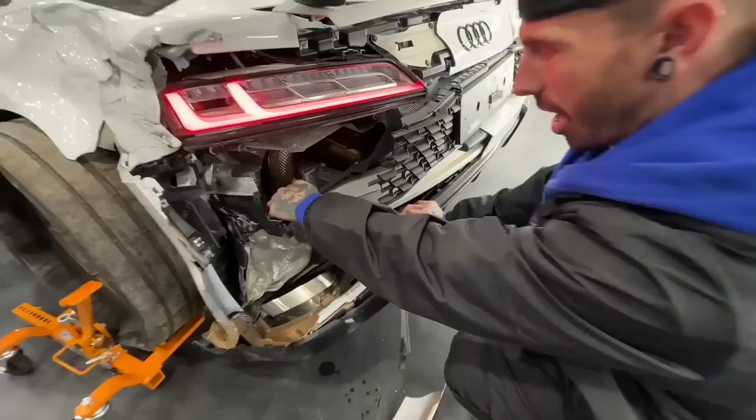You rarely find a German car with a real rear engine, a great design, and high-speed performance. Mat Armstrong decided to bring the R8 from an auction and repair it. The goal was to return the car to its original condition, and perhaps a little better, to be a gift for its owner, Liam. Let us repair the improved 2022 Audi R8.

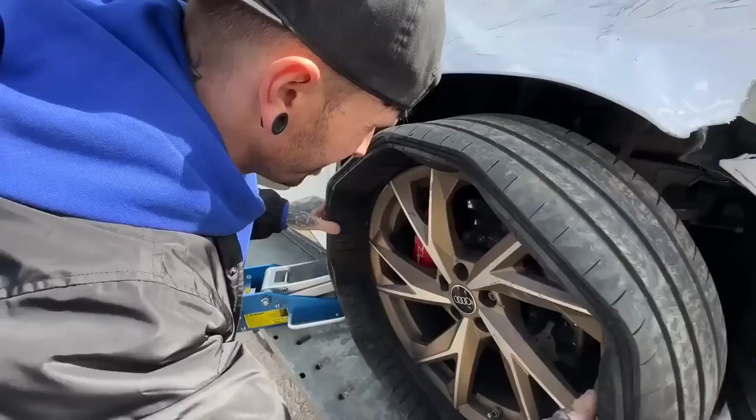Let's start talking about the German car. A strong shock, or the entire collision, was from the back, and this made their concentration at the beginning on the back of the car. It is true that the view from afar does not seem simple, but most likely nothing reached the structure or the surrounding parts, and this gave them great hope that the reform will not take a long time or cost a lot. Here, there are no open airbags, so it will be able to move normally.

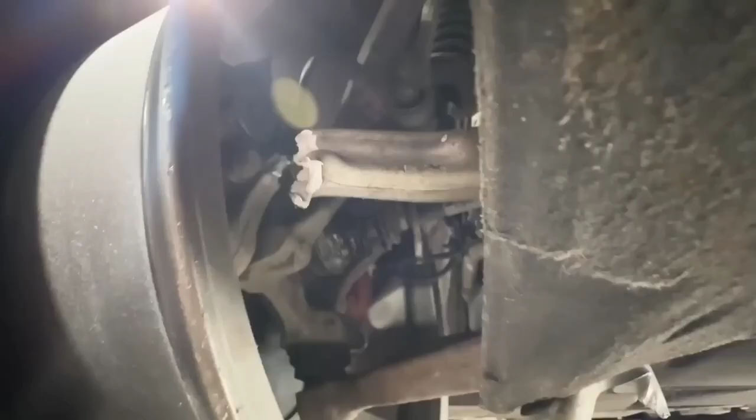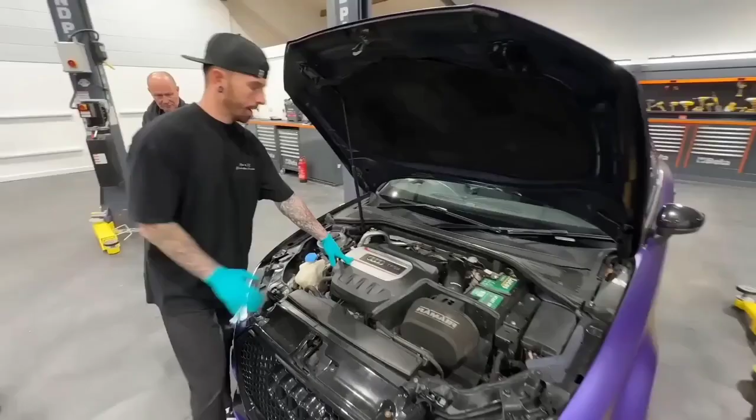You have connecting bars and rear control arm, which are essential parts of this. When affected, it makes the car unable to properly direct or move, and this clear damage requires the replacement of these parts completely. Initially we know most of the damage that occurred in the R8, but before we start the repair stages, let's take a look first on the Audi also, but this time the S3.

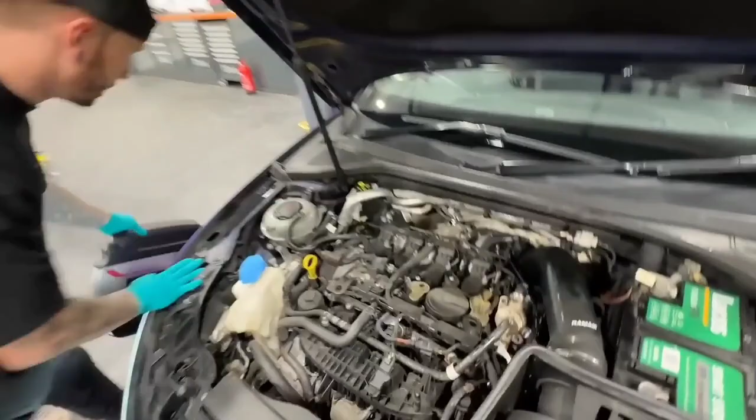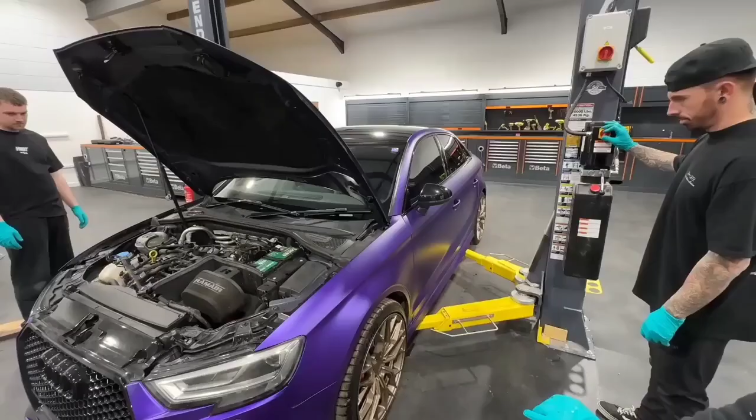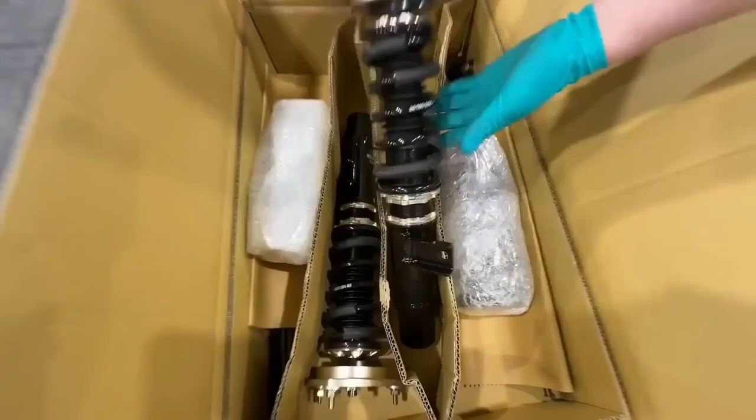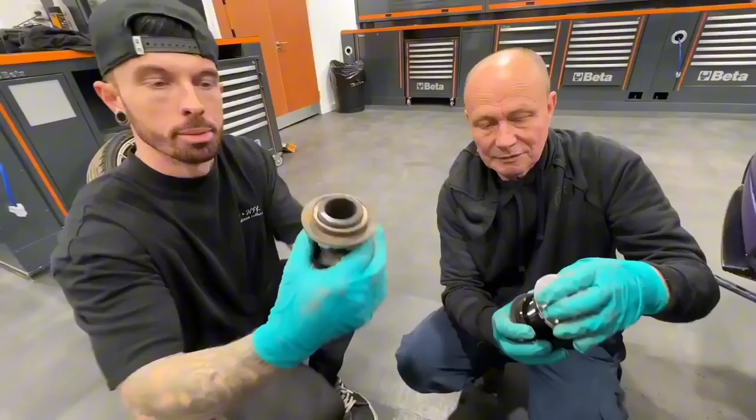This car was supposed to make thick white smoke, usually an indication of problems with the burning of oil inside the engine. They initially suspected the turbo, because if there is a problem in it, it is natural for the oil to leak into the combustion chamber. They removed the plastic cap from the engine interface, finding other parts with a lot of oil. The presence of oil residue on these parts confirmed the presence of a leak inside the combustion chambers.

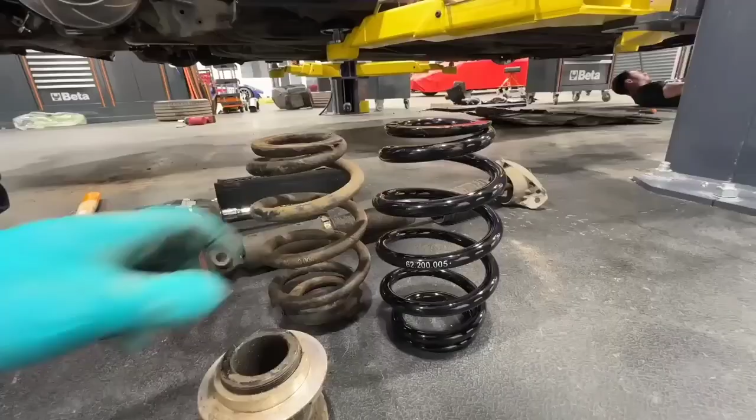They decided to completely replace the turbo to ensure the problem is solved from its roots, and bought a new turbo kit. They started removing the air filter tube, lifting the car on a crane, then removing the two front wheels. Next, they reinstalled the air filter tube, but from a different place.

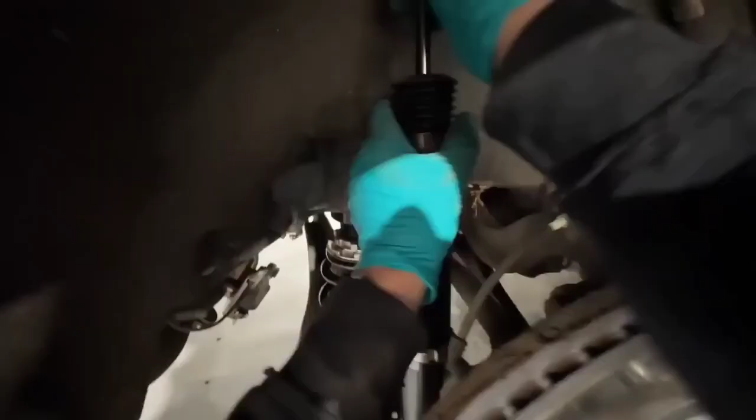The shock absorbers in this car were not the best. They removed the right cover and bought new shock absorbers, better than those installed in the car. They removed the battery completely, an important step to ensure enough safety when working on the electricity of the car.

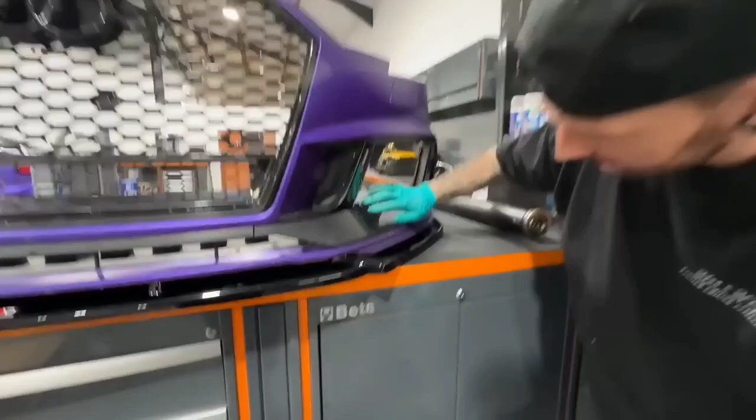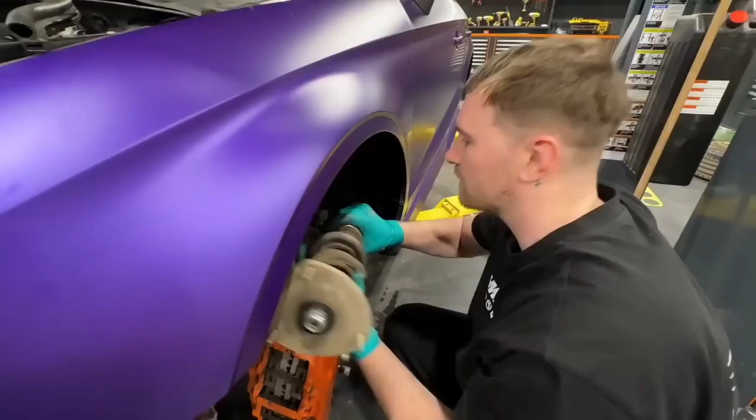He began removing the front shock absorbers and removing the lining of the shelf on the left side, while they were trying to decipher the original control buttons on the steering wheel to replace them and install new control buttons. Armstrong wanted to lift the car a little from the ground, because lifting it facilitated its movement over bumps and reduces the possibility of friction.

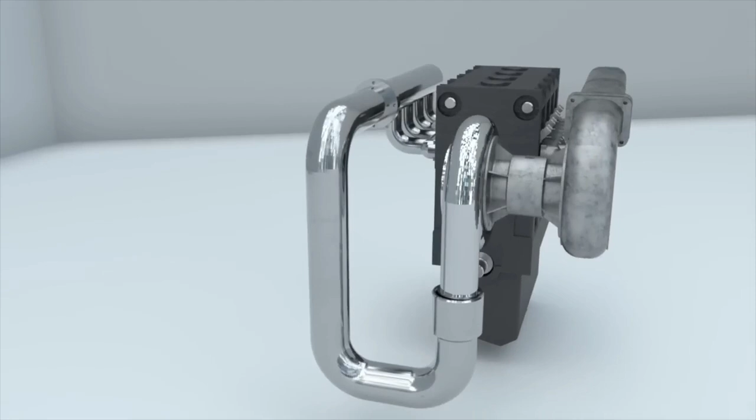Of course, the spring is supposed to install this height on its base. The new spring is slightly higher than the old spring. This is a direct and simple solution to increase the height of the car without complicated adjustments, so it does not need to do anything else to increase the height.

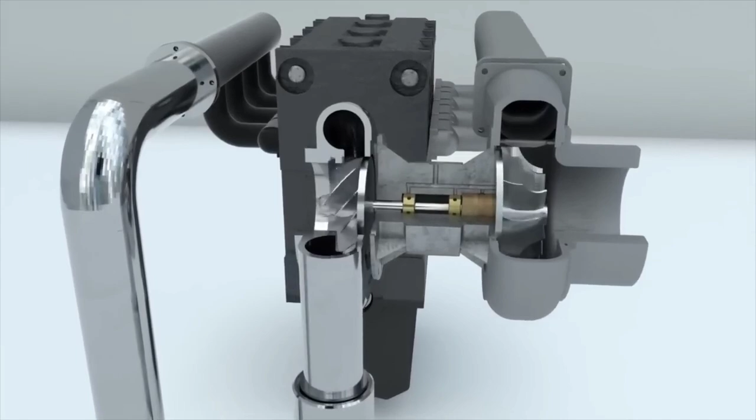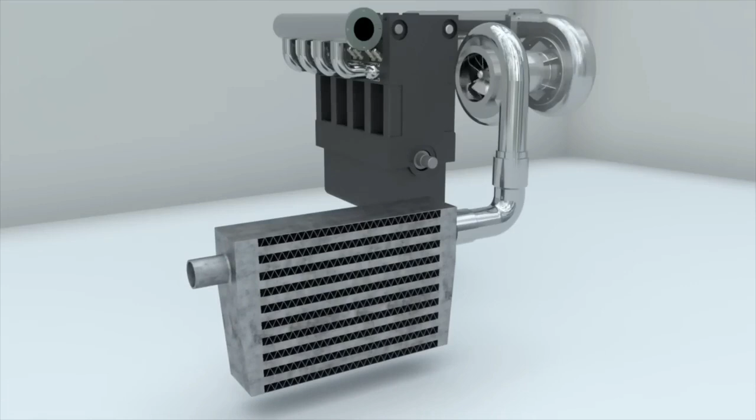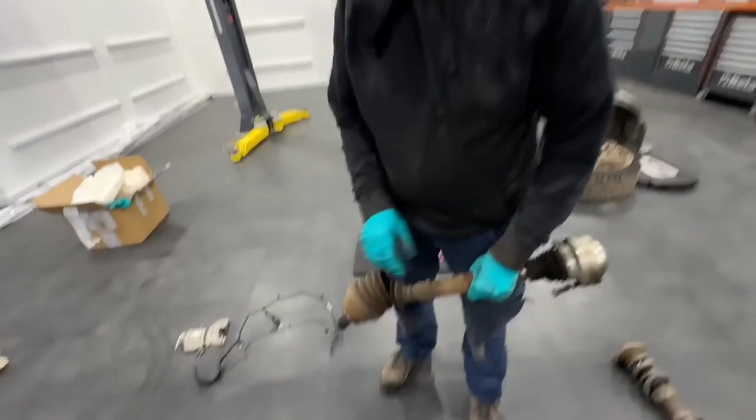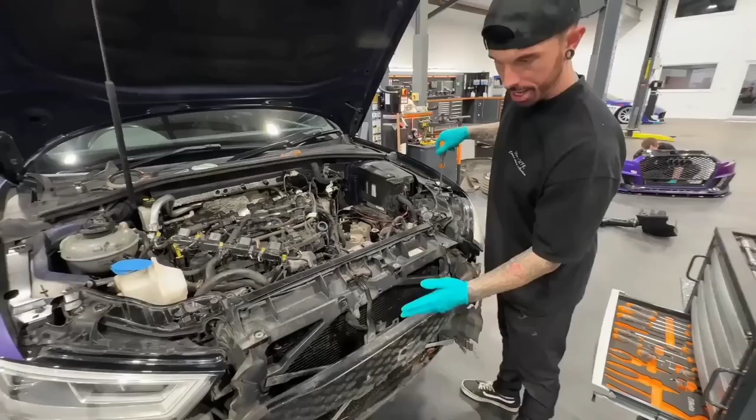He started draining the transmission oil and also bought a liquid to clean and polish the car. He bought a front wing fender, but its size and dimensions were not accurate, reflecting the difficulty of installing non-original parts, or parts designed for a different model, because the wing they bought was for the RS3 and not the S3. But in the end, they knew how to install it properly, and it looked good.

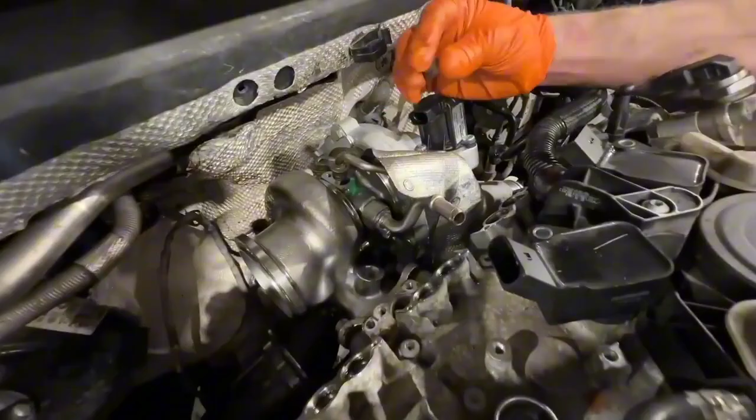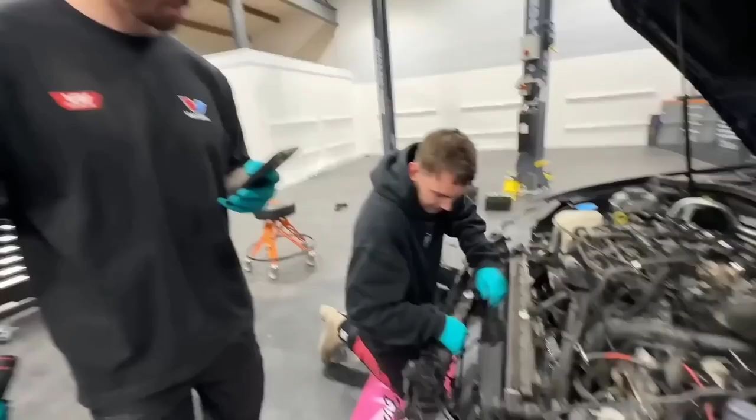Let's quickly remember how this turbine works and what its idea is in the first place. The turbine contains a part called the turbine wheel, which looks like a fan. This turbine is responsible for converting exhaust gases into rotational movement. The exhaust gases collide with its fan and push it to rotate at a very high speed, reaching up to 100,000 revolutions per minute.

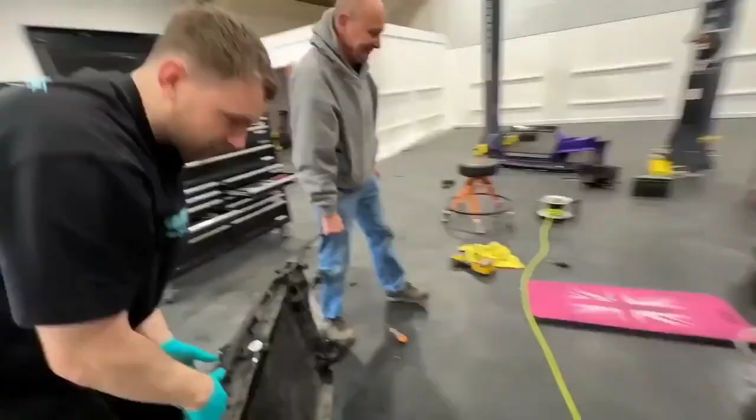This turbine connects to a shaft located in the middle of the turbo. This shaft is the link that transmits movement from the turbine to the compressor. On the other end of the same shaft is the compressor, whose function is to pull fresh air from outside the car through the air filter and press it strongly towards the engine.

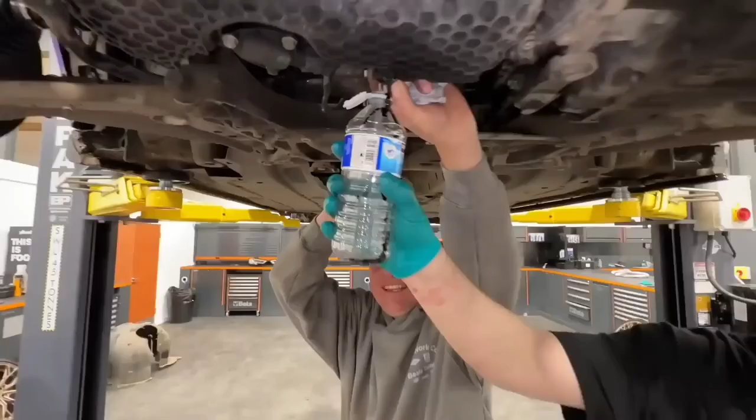This compressed air, after cooling, is characterized by high density, meaning more oxygen goes to the intake manifold above the engine. When this air enters the combustion chamber, it increases the power of the engine, increases the torque, and increases the overall strength of the engine.

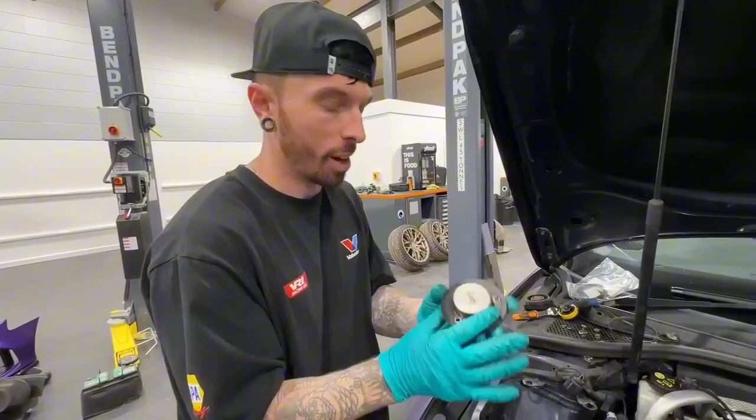This is the old drive shaft, the main part of transmission from the gearbox to the wheels. It was clear from its condition that it was in very bad shape, so he bought a new drive shaft and began installing it in its place.

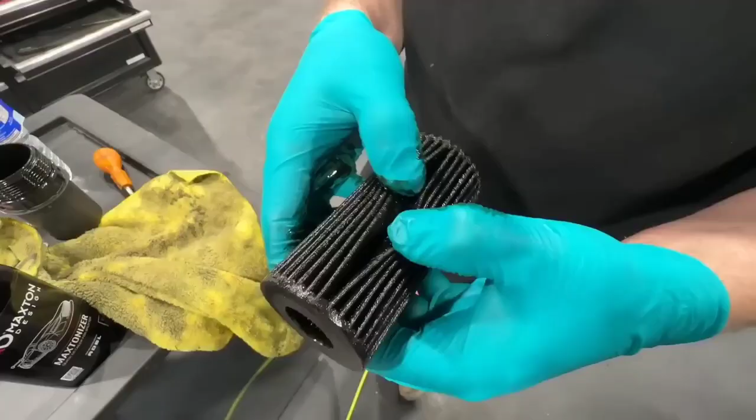The intercooler of this car was dirty with a large amount of oil, and to reach this cooler, located behind the air conditioner, he was forced to dismantle the entire front end, including the lamps and the protective bumper. This step requires time and effort, but he started doing it quickly.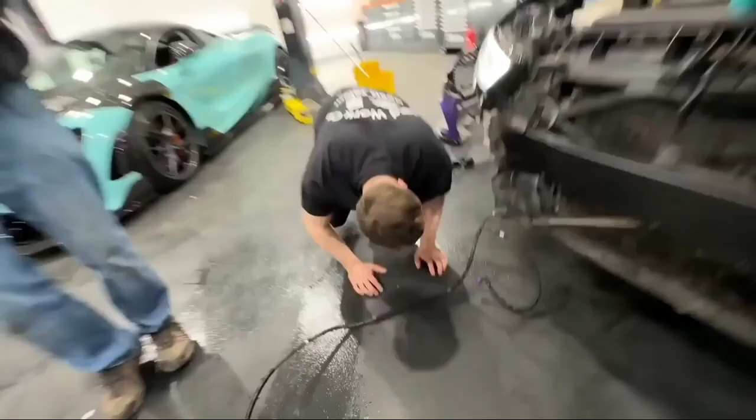He removed the first front lamp, which needed some polishing. Someone else was with him working on installing the turbo immediately. He installed it in place, but it was not yet fixed with bolts and clamps. He bought a new black gasket and started installing it.

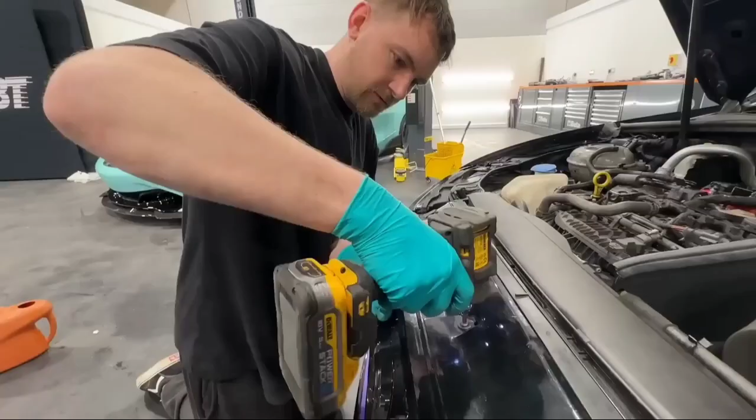He removed the ignition coil to ensure there was no oil on it, and began installing the coils. The ignition coil, or ignition module, is responsible for generating the spark necessary to burn fuel in the combustion chambers. He then began to disassemble the entire protective rod.

After that, he reached the intercooler and started removing it. He wanted to clean it, and to clean this cooler specifically, you will likely need gasoline or anything containing alcohol. So he brought gasoline and started pouring a little of it into the cooler's opening.

He moved the cooler around so the gasoline would reach all its internal parts, then poured all the gasoline back out of the cooler. This simple cleaning process restores the cooler to its original state and ensures its maximum performance.

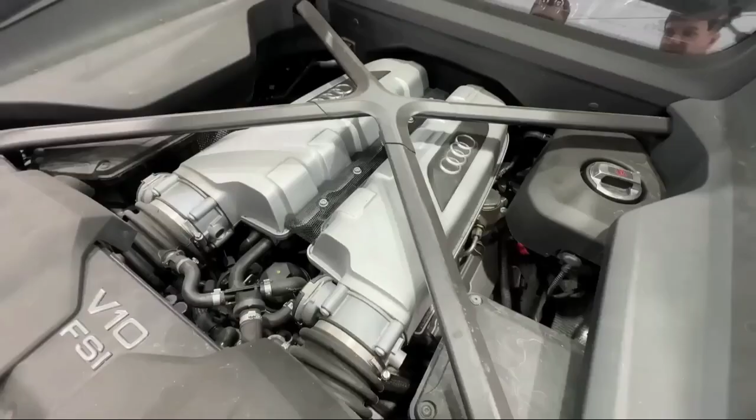He finished that step, brought the cooler and pipe back into the car, installed the tubes and connected the hoses. Of course, the tubes must be installed tightly to prevent compressed air from leaking out of them. He then installed the protective rod and fixed it well.

He started draining all the engine oil and discovered a problem in the camshaft system. The camshaft adjustment, or VVT system, controls the opening and closing of the valves to improve engine performance. This is a common problem.

Especially in TFSI engines, many have faced a problem causing oil leakage. This leakage affects the oil level and harms the engine in the long run. So he started removing pieces of the old VVT system and installing new pieces to solve this problem completely. The new spare parts guarantee correct valve timing, which is a perfect precaution.

He removed the old oil filter and installed a new filter in its place. He brought new engine oil and began adding exactly 5 liters. After finishing filling it, he started the car, and it worked normally the first time.

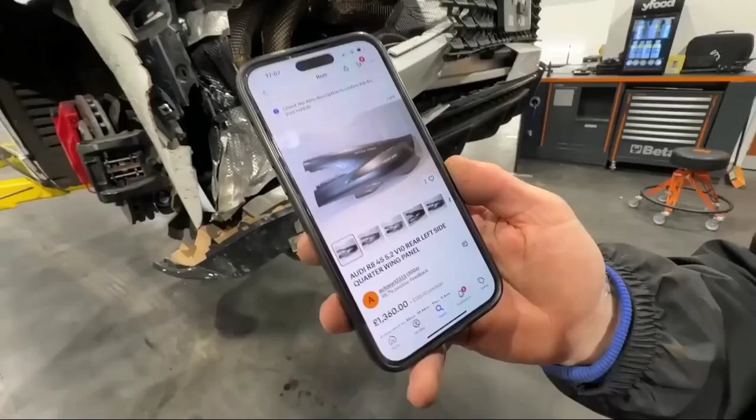The engine sound was smooth and free of problems, with no smoke rising from the exhaust. But suddenly an oil leak appeared from the bottom of the car. This oil leak was coming from the turbocharger return line, so he brought a new part and started installing it in the line where the problem was.

He tightened the shocks and screws from the top, put the wheels back in place, and brought the car back down to the ground.

After that, he went out and tested the car and had no malfunction. No problems at all. We finished working on the first Audi, the S3. We now start with the R8, which is our topic today.

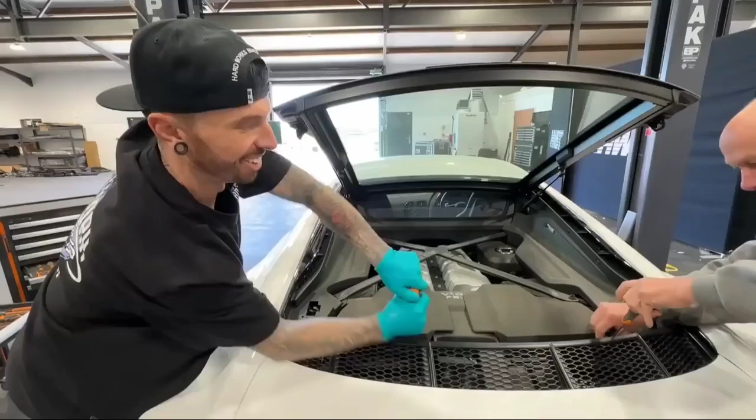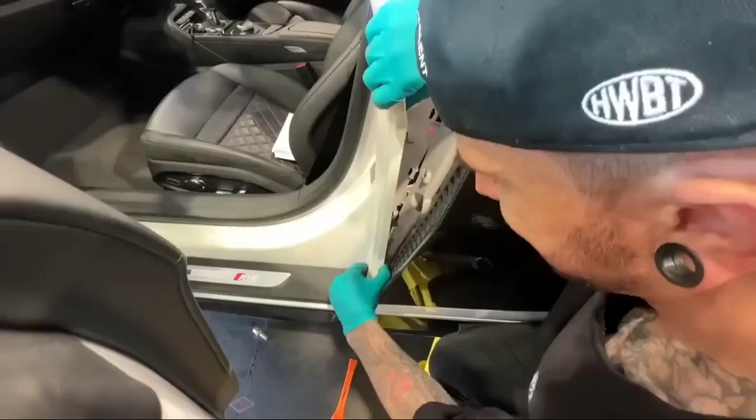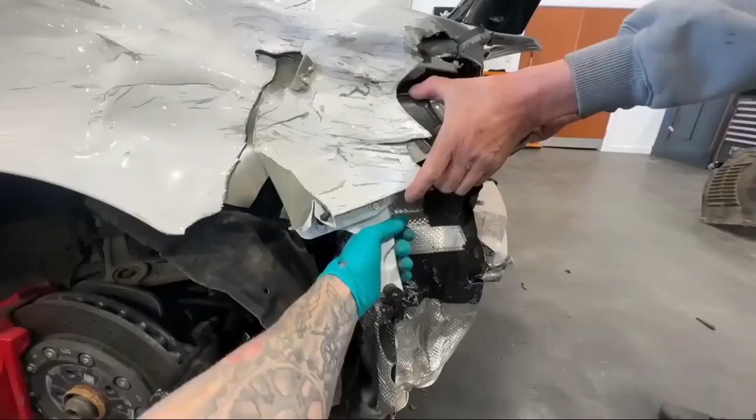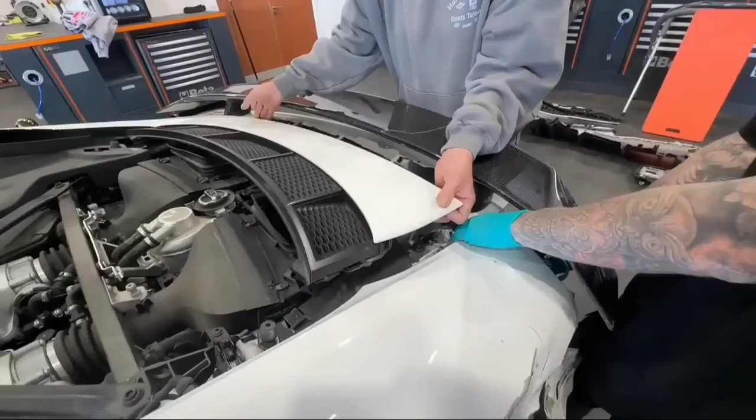The blow here was in the left back flap, and the rim, of course, and the arm still need to be changed. Try the car first. The sound of the cracking that appeared at the beginning had completely disappeared. This is evidence that the work is going well so far.

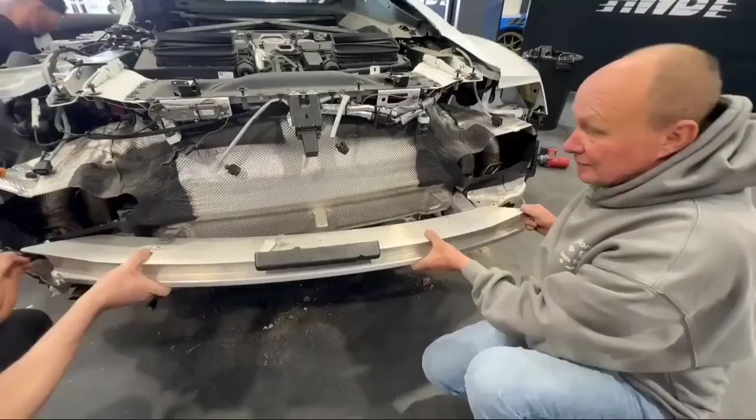He started to remove the threshold from the bottom. After that, remove the plastic parts. Remove all parts of the back quarter to start replacing the damaged parts. Remove the air filter housing. Note that the installed exhaust system has been broken. Remove the air filter from the other side.

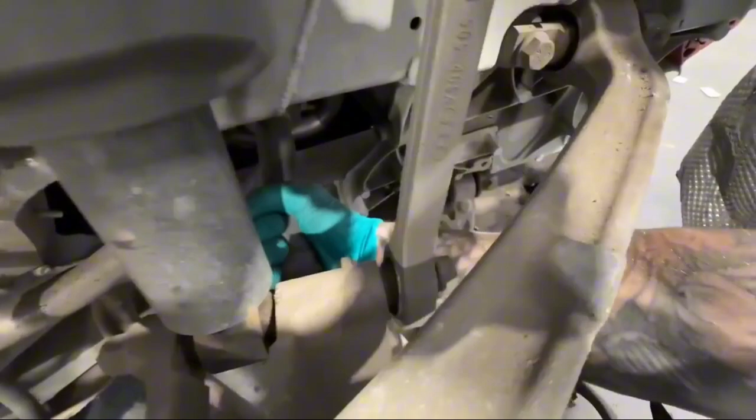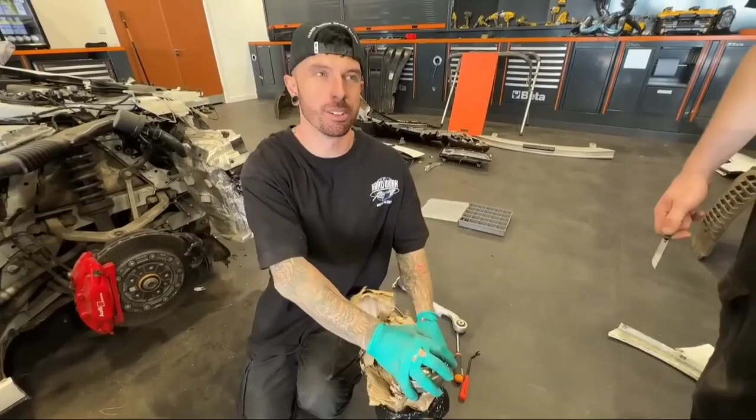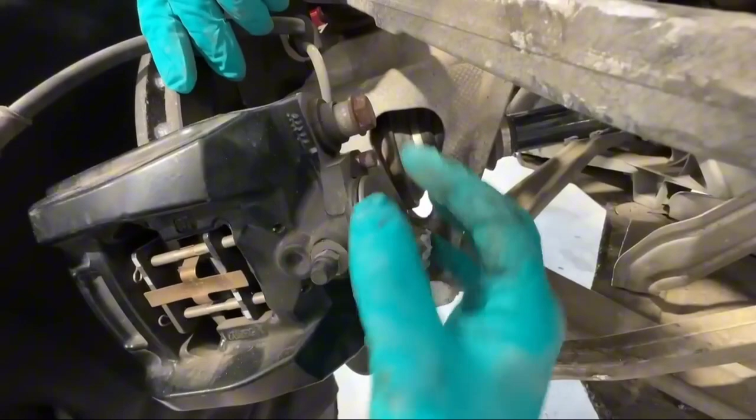Next, he began to remove all the screws that fix the back structure of the car and remove this part completely. Bring a hammer and began to adjust a portion of the back flap structure below the back lamp. Using the hammer is a temporary solution at first and not at all accurate, but to avoid leaving voids between the back lamp and the flap, he hit it hard, so this part stuck out too much. They had to completely remove the car flap to get to this part quickly.

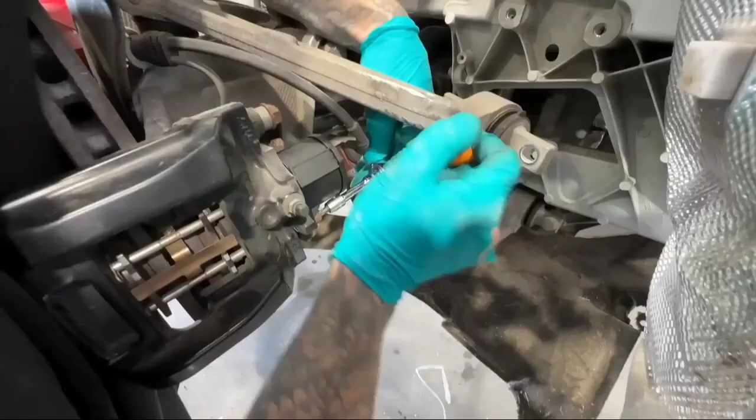He removed the flap, brought a welding flame and began to heat the parts of the structure surrounding the front lamp. The heating, of course, makes the metal more flexible and allows it to be modified more precisely, because cold methods are not a suitable solution for these parts. He began to heat and adjust it so that the front lamp was finally installed without any gaps. Pass the flap. Second, the front lamp bases he began to fix well in place to ensure that they do not move or fall from their place at all.

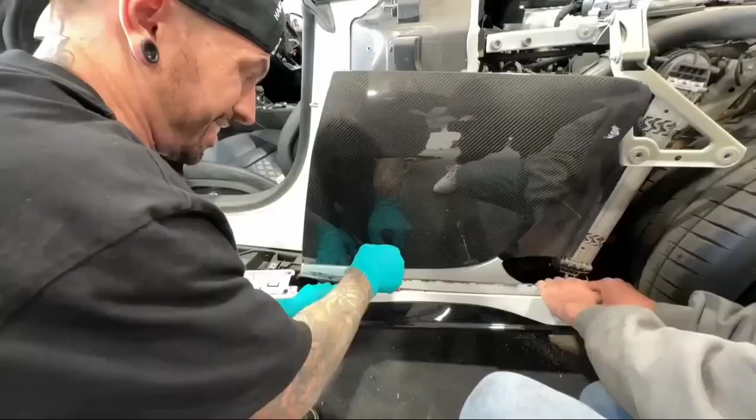Return to the door installation step. William was installing vehicle ventilation holes. These openings are important to cool certain parts or to improve aerodynamics. First, bring the glass and began to install it. After that, bring up the upholstery of the door and began to install it and fix it well in its place. Test the glass and found that it is crooked and not fixed properly, unlike the other side. He did not face any problems there.

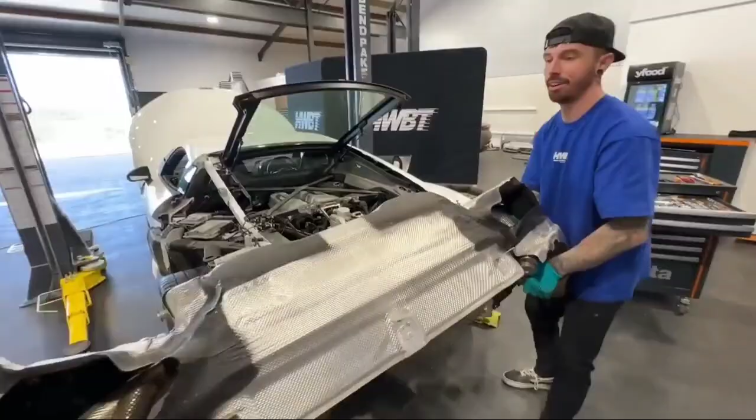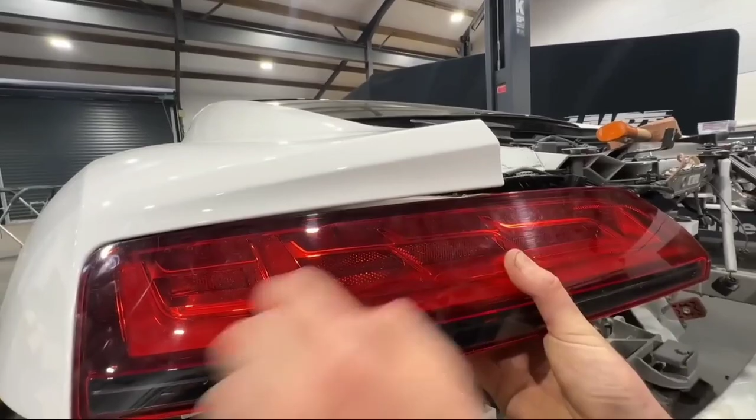He removed the upholstery again to see the exact place of the problem, but he will leave it now and return to it later. Bring part of the rear hood, made from carbon fiber. It is not normal. He removed the old one and fitted the new one in place. He bought a new exhaust box, much lighter than the old one. The lower tube looks as it is. The lower tube here is the first part.

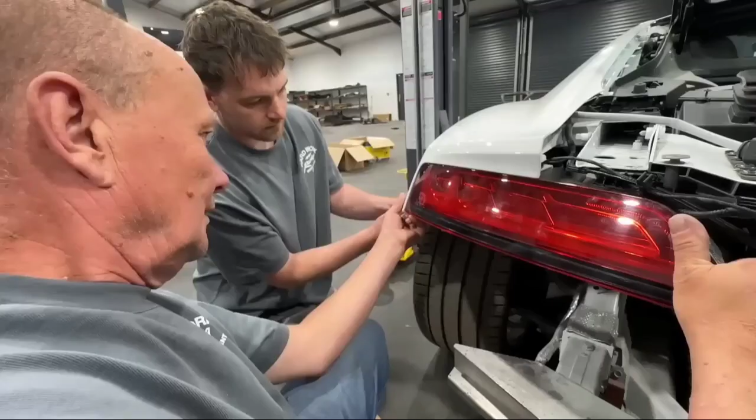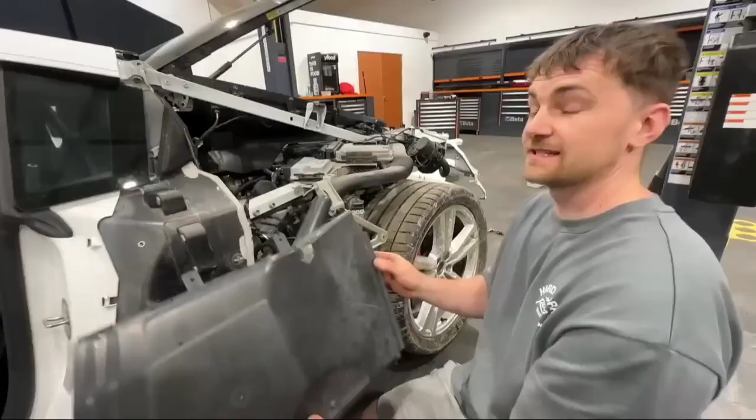Of the new sports exhaust system, they started installing it in the car, and the exhaust tube, even if it is modified, is usually fitted with an oxygen sensor. The sensors installed in the exhaust tube must be connected tightly to give very accurate readings. The new exhaust system does not have an OPF filter, whose function is to reduce harmful emissions from the exhaust. Of course, it will make a much higher and stronger sound, but there is another problem, which is the difficulty of reading the oxygen sensor.

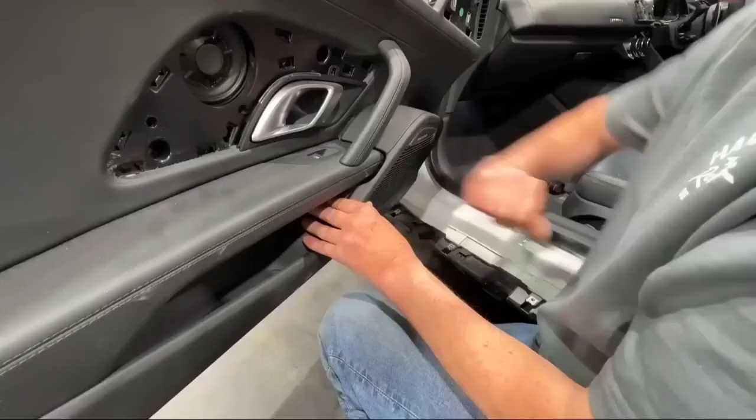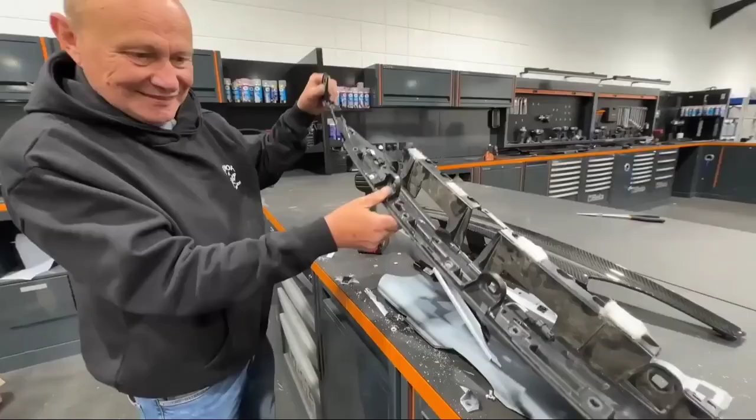It is the difficulty of reading the oxygen sensor present after the filter, because the computer expects the presence of an OPF filter in the original car, and its reading as well. Consequently, they may have to do special programming to avoid the appearance of the check engine light, because the programming cancels the readings of these sensors, so the fault light does not appear on the instrument cluster. They started installing the rest of the exhaust system, such as the middle pipes, as well as the final connections to completely close the exhaust system.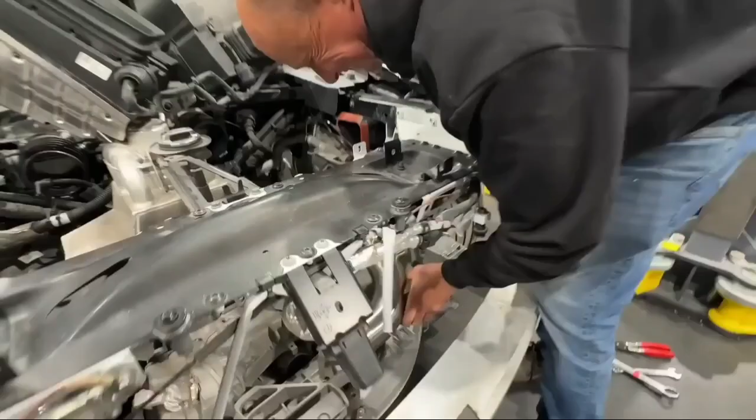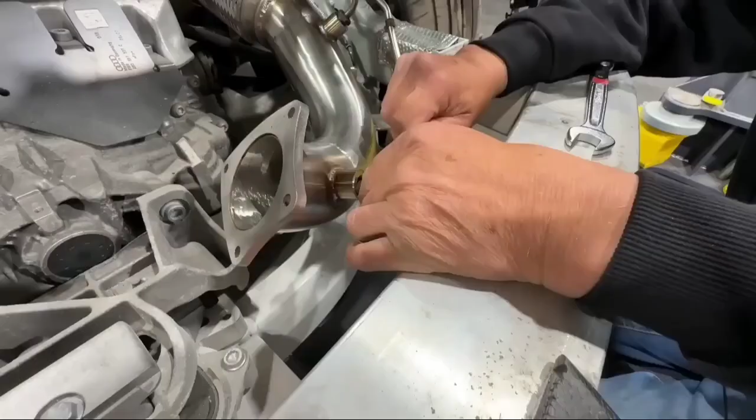These are the back tubes and the final sound, or the so-called silencer. The silencer box is responsible for reducing the exhaust noise, which is the last part of the entire system. Each part is installed in place with metal fillings on it to prevent any leakage of exhaust gas between exhaust tubes and chassis. There are thermal insulation strips in places behind the exhaust. This thermal insulation is very important to protect the car parts from high exhaust heat.

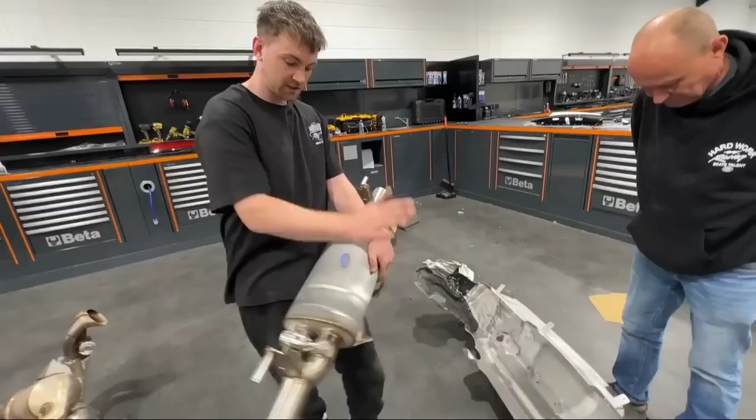Next, the hose is installed for opening and closing the exhaust valves. These valves allow control of the sound level according to the driving mode. After that, the engine was operated to hear the exhaust sound.

After the adjustments, Armstrong brought all the pieces damaged as a result of the accident, such as the rear diffuser, the front splitter, and the fine front wings known as canards, which help to direct the air and give the car a sporty and strong look. He also requested the side sills. Of course, some of these pieces were bought normally, while others were made of carbon fiber.

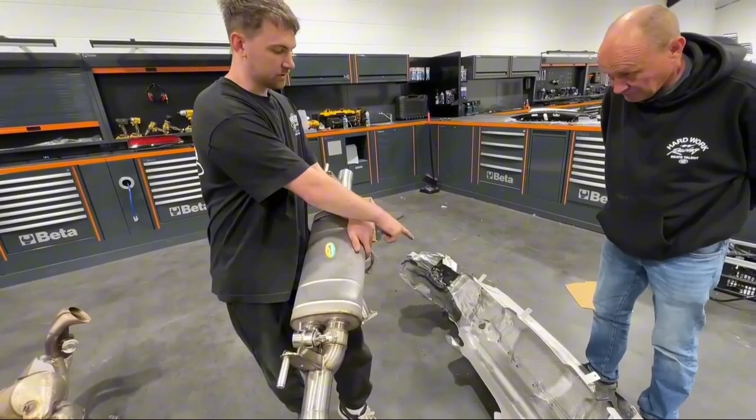He brought the front splitter and began to put an adhesive around the entire structure. Of course, he had to use a very powerful material to ensure it is well installed. After that, he installed it in the car and fixed it with nails from the bottom to ensure that it does not fall later. He began to install the wing on the front bumper from the side.

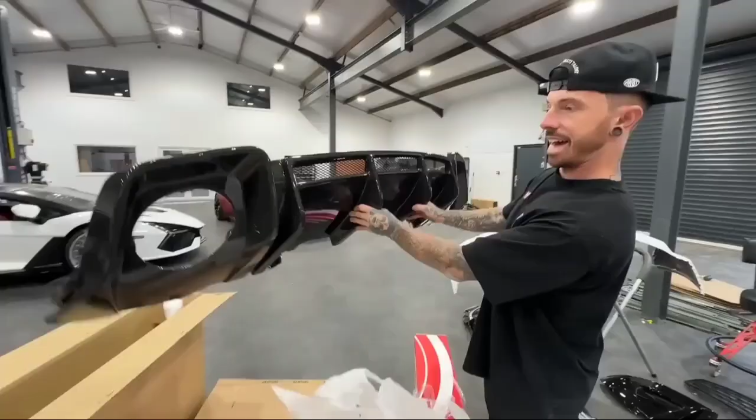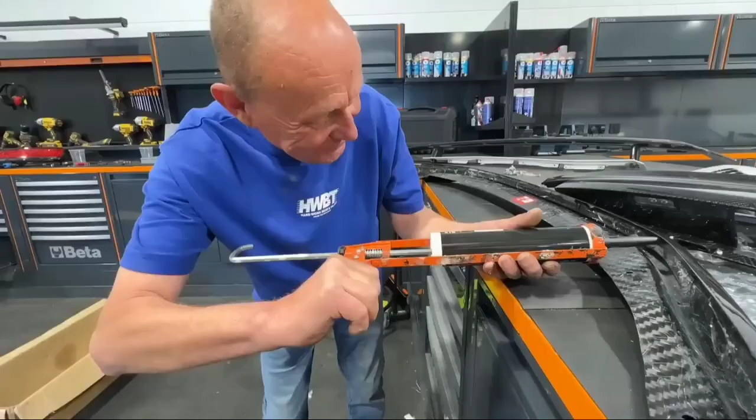He began to install the top of the bumper. After that, he installed the new bumper with its new diffuser, brought the Audi logo, and started installing it on the rear bumper. They also brought the new carbon fiber sill and began to put the material on it. After that, they installed it in the car itself.

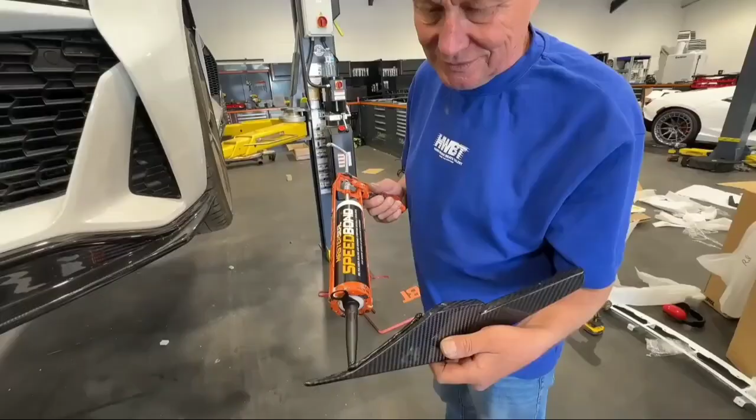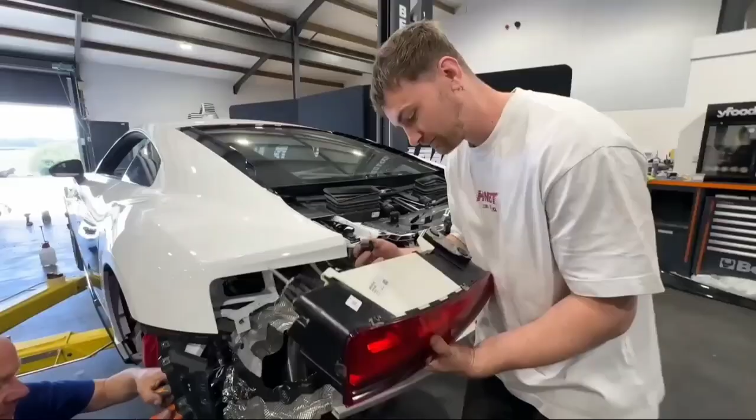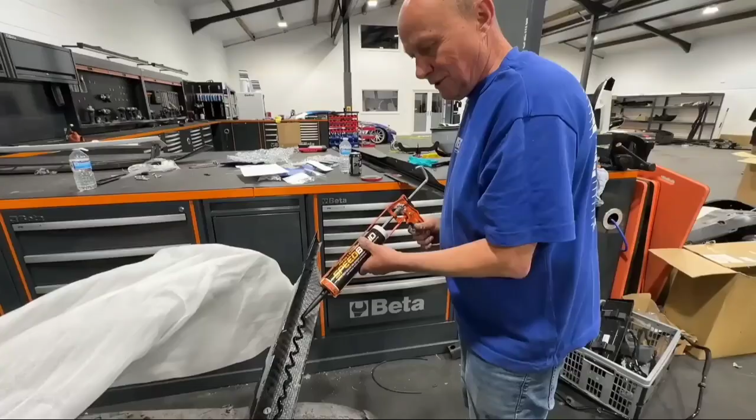Now we come to the part that gives the car a very sporty look, which is the rear wing. As usual, he didn't miss this, and he bought one made of carbon fiber and began installing it on its base as well. But the bases in the car on which the back wing was installed, he suspected were not level or in a straight line. However, they installed the back wing and there were no problems with the installation, and the gears were set on the right and left.

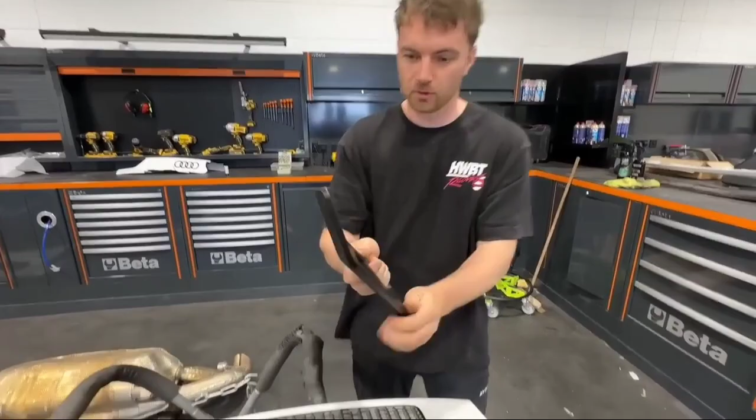Secure the part behind the hood well in place and close the hood completely. The last shot was the installation of the new tires of his car, and thus, it can be said that the front and rear parts of the car were completed, and after good work, the dashboard did not show any lights. Test the car at first and no problems appeared at all.

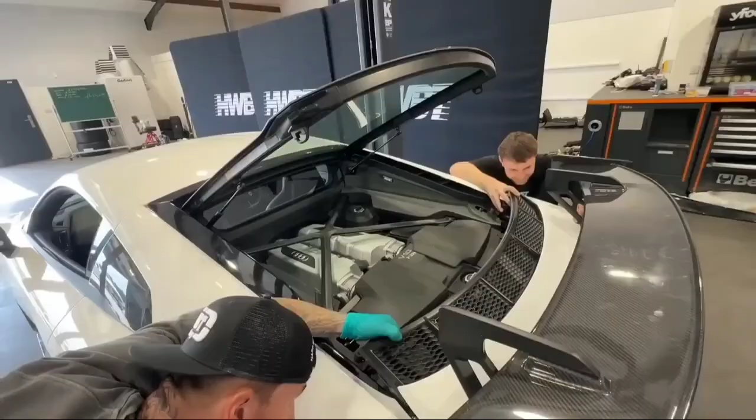After that, they made a quick tour of his garage and then went to a place specialized in sports rims. They saw that this rim is very suitable for a German sports coupe, so they bought it quickly. And on the way back, they noticed a surprise, which is that a warning light lit up, and that was due to the filter that we talked about. Solving this problem lies in programming only.

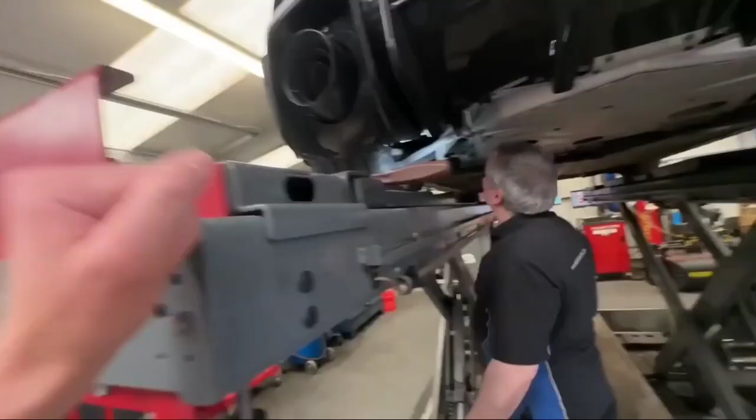Go to a place to adjust the air pressure and wheel alignment. The technician who was there discovered that the rear axle, or the swing arm in one of them, had a slight invisible curvature which quickly erodes the tires and wears them over time. Program the car so that the warning light disappears. After finishing, the warning light disappeared immediately.

Finally, the Audi returned to the workshop and they put it on a scale to know its weight. They discovered that the weight of the car fell by about 100 kilograms from its original weight, thanks to the very large amount of carbon fiber installed, with the weight of the gears at 40 kilograms. With this, we have completed a trip of repairing and modifying the R8.